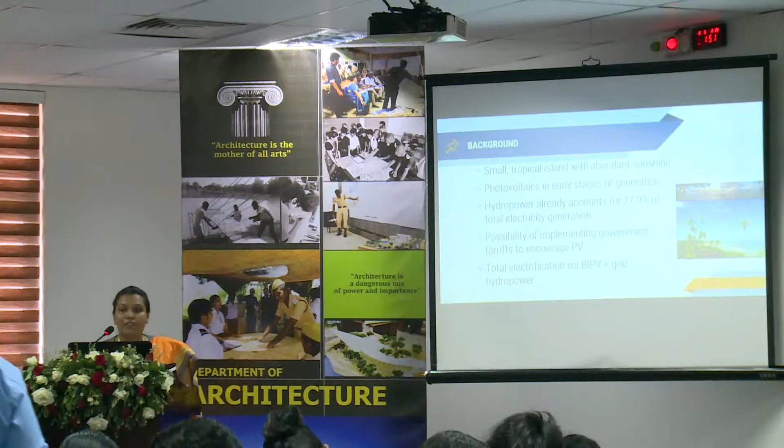So though we receive enough solar radiation, the utilization of photovoltaic panels is still in its early stages of generation. And hydropower already accounts for 27.9% of the total electricity generation.

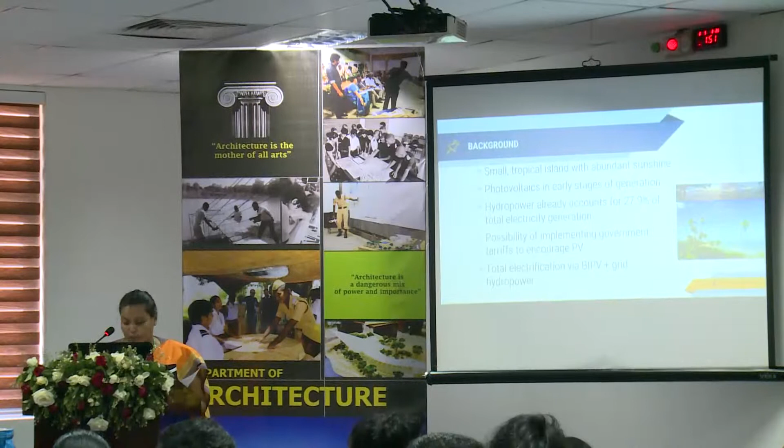So there's possibility of implementing government tariffs to encourage photovoltaics. Further actions are also being taken to encourage photovoltaics in Sri Lanka, as it has potential.

So why we selected Sri Lanka for this study is: Sri Lanka's total energy requirement for a year is around 11,125 kilotons oil equivalent, as per the statistics we got in 2015, right?

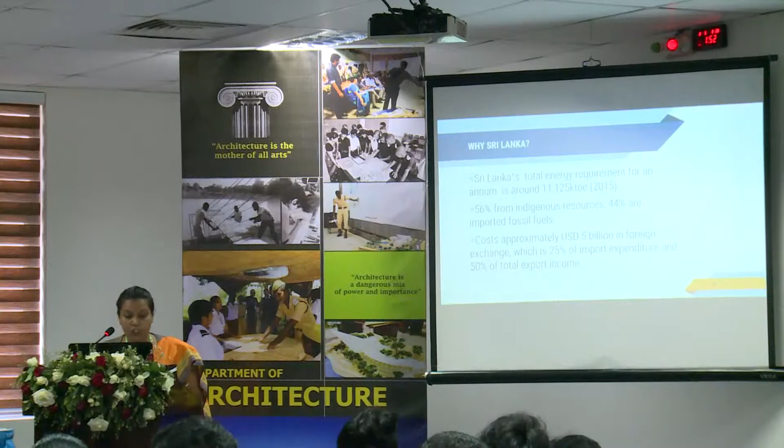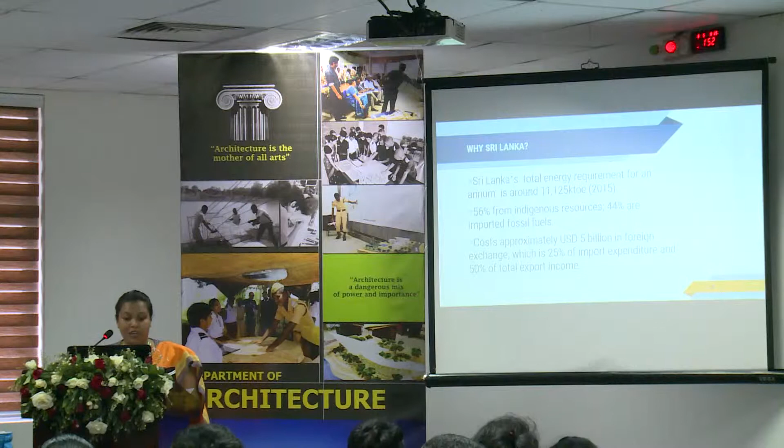So out of the total energy requirement, 56% is from indigenous resources, and the rest 44% is imported as fossil fuels. For this importation, we cost $5 billion per year, and that cost is 25% of import expenditure and 50% of total export income.

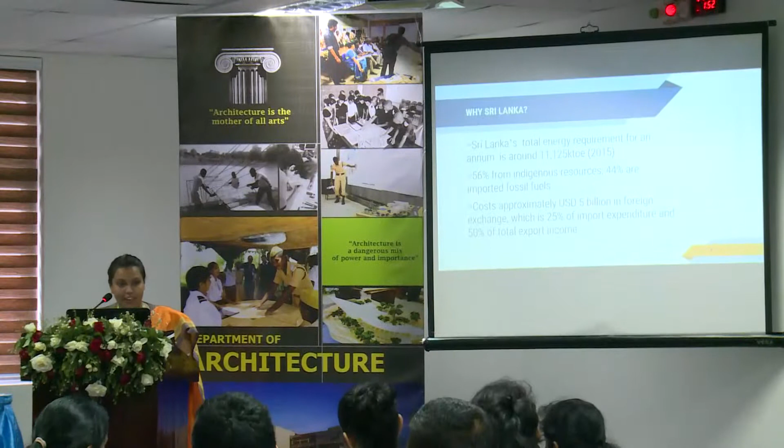So can you imagine, or can you understand the criticality of this situation, what we waste for importation of energy, right? Okay.

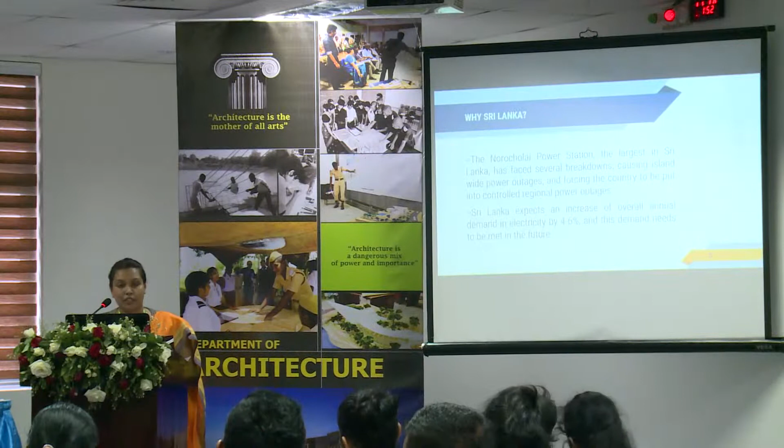This situation is because we have a huge large-scale power station in Norochcholai, but we know that it faces several breakdowns from its beginning. So at the moment it's not practical to use this Norochcholai power station to meet national demand.

So there's a requirement to put regional power outages all around the country to fulfill this energy demand. Sri Lanka expects an increase of overall annual electricity demand by 4 to 6% in the future.

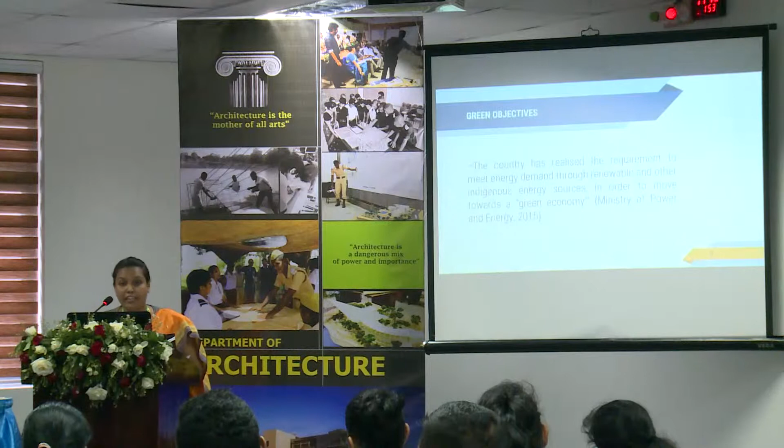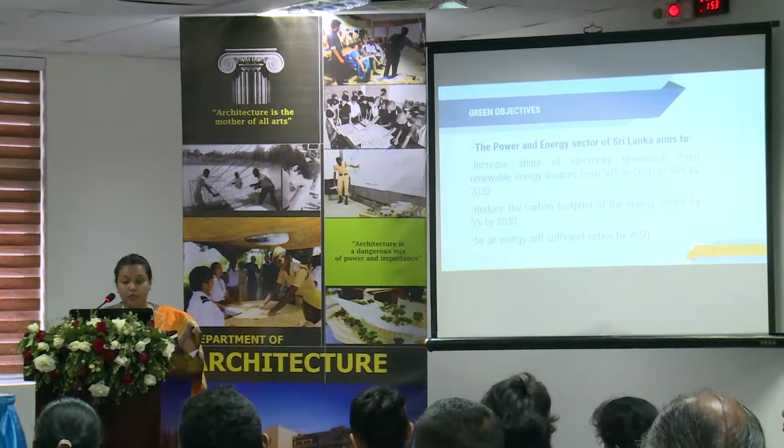So government has identified this potential increase in energy demand in the future, and as a solution, they have identified the need to go for green energy solutions.

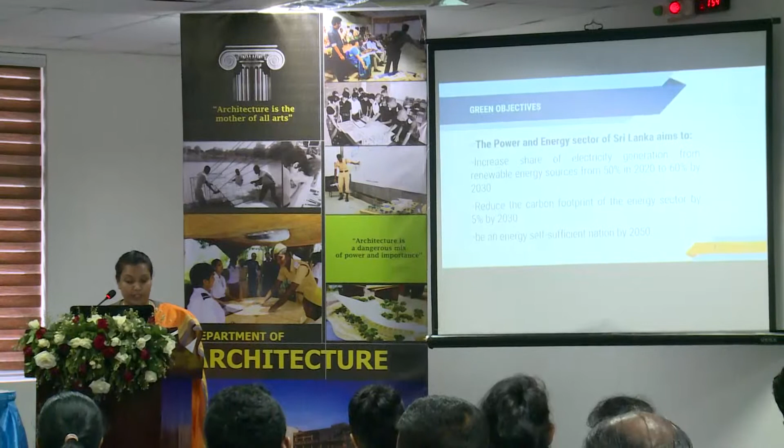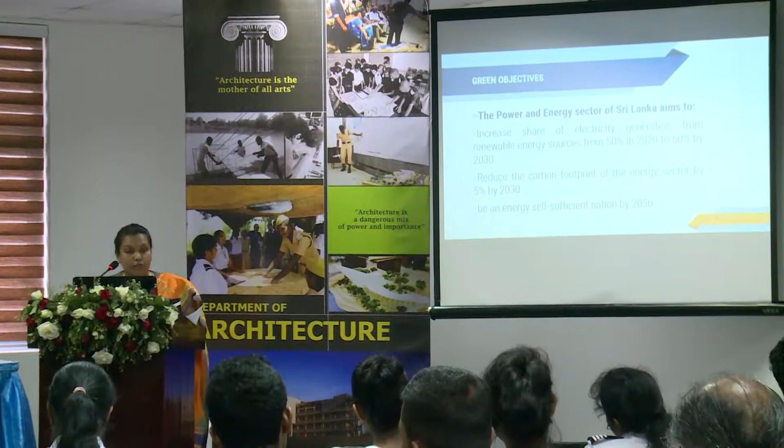Increase share of electricity generation from renewable energy sources from 50% in 2020 to 60% by 2030. This is what the government is predicting to have in the future, and they predict to reduce the carbon footprint of the energy sector by 5% by 2030, and ultimately be a self-sufficient nation with energy by 2050.

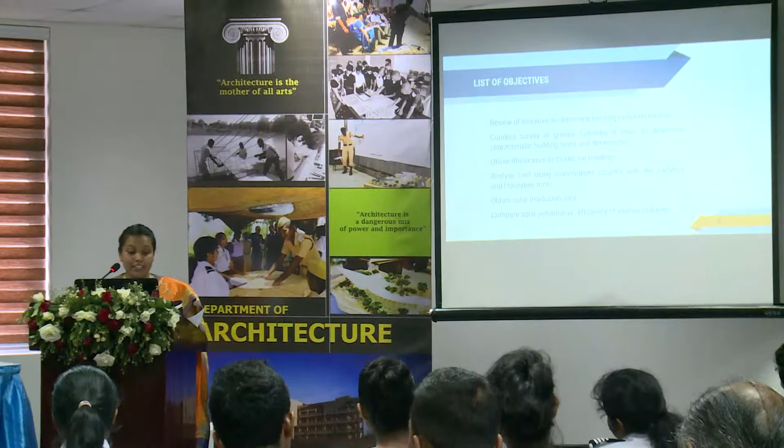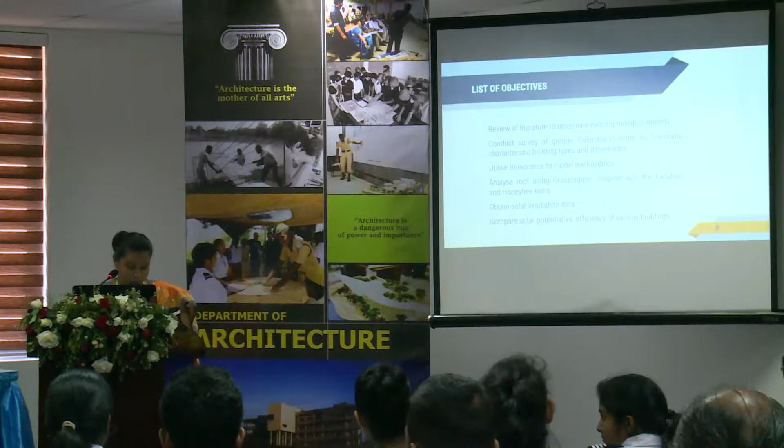So to achieve this target, they have listed out objectives, and now we are moving into our research objectives. So in order to conduct this research...

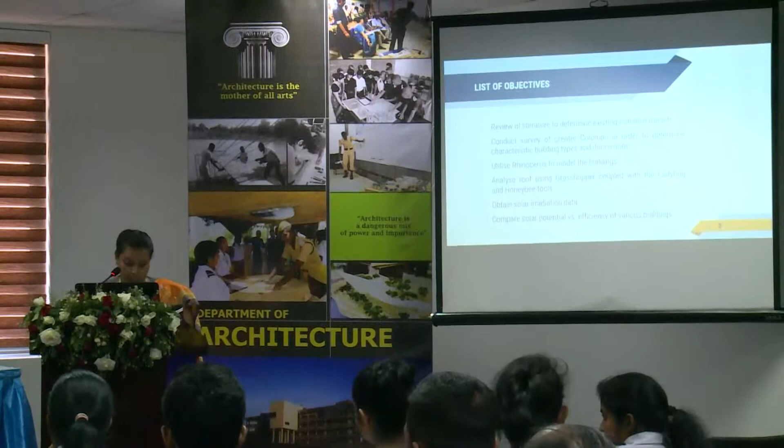In order to determine the existing radiation models, then as the second step, we surveyed several neighborhoods in greater Colombo. This was conducted in order to identify characteristic building forms and their dimensions.

Then Rhinoceros tool, which is a simulation software, was used to model the basic domestic buildings, coupled with the Grasshopper plugin and Ladybug, and there's a tool called Honeybee. So we use that as well in order to analyze the roofs in terms of incident solar radiation.

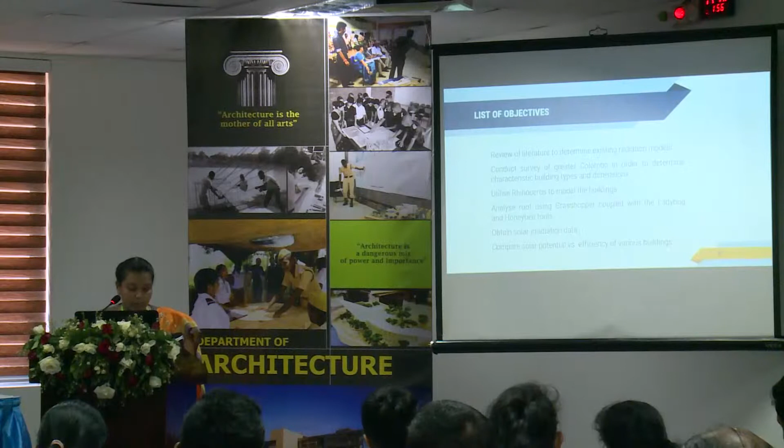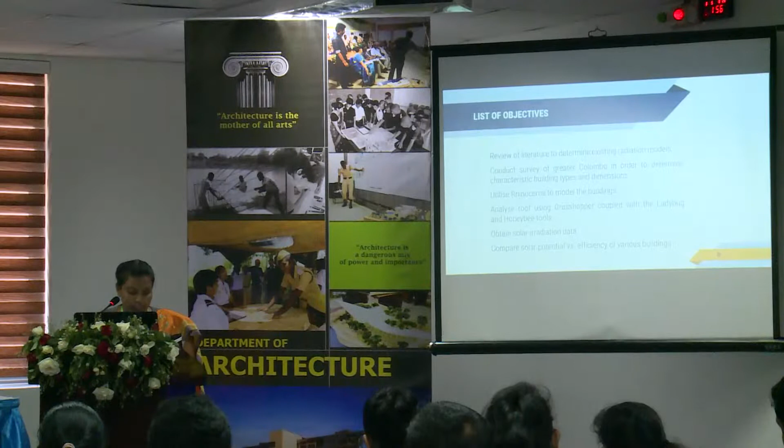Then the surface area to volume ratio of the building was calculated as a measure of thermal efficiency of the building. That's how we calculated the thermal efficiency of the building. Then, moving into the methodology.

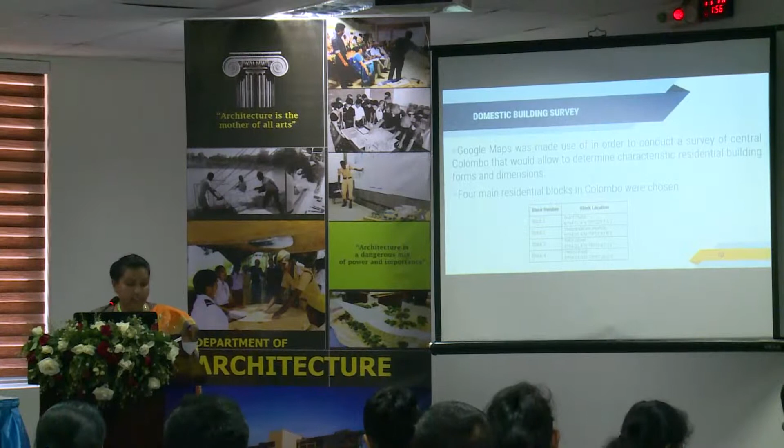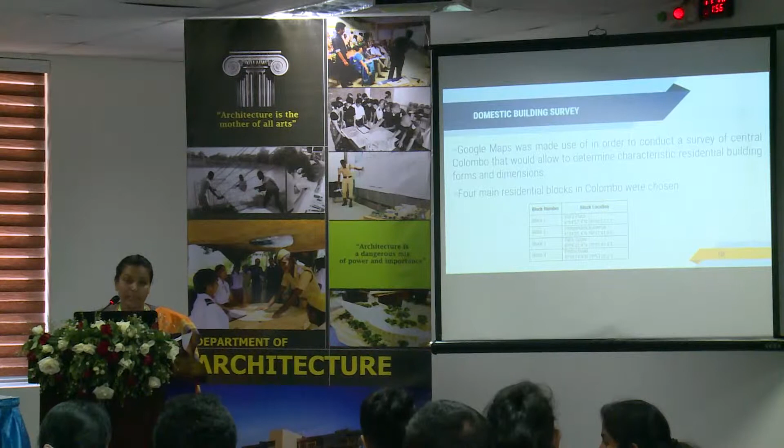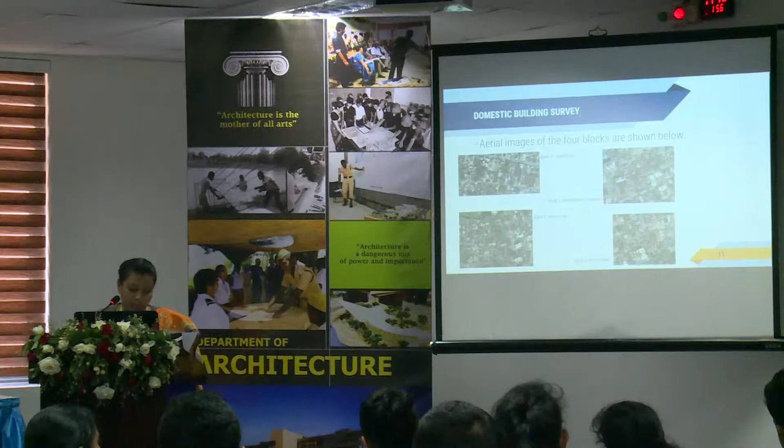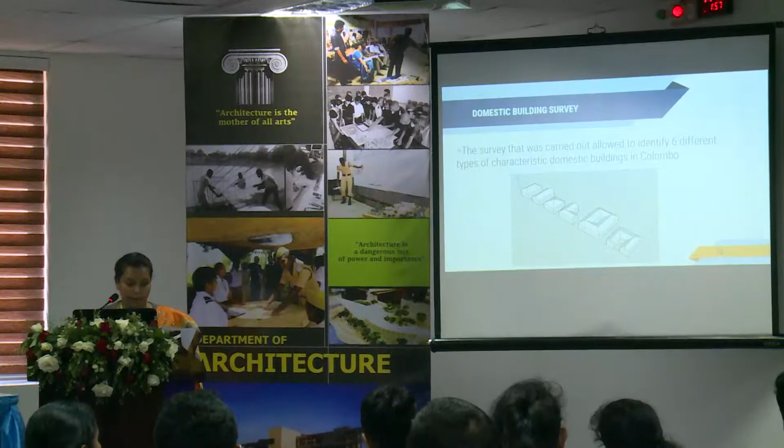Out of these 4 neighborhoods, 6 characteristic buildings were identified. These are the 6 characteristics which we identified as the samples. Their dimensions were obtained as shown in this table.

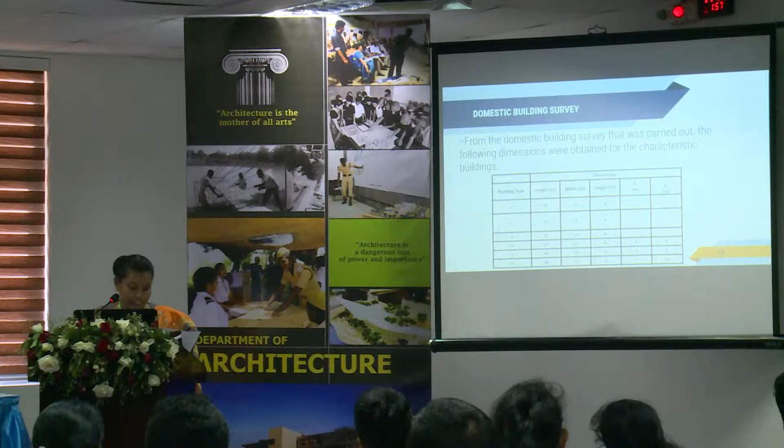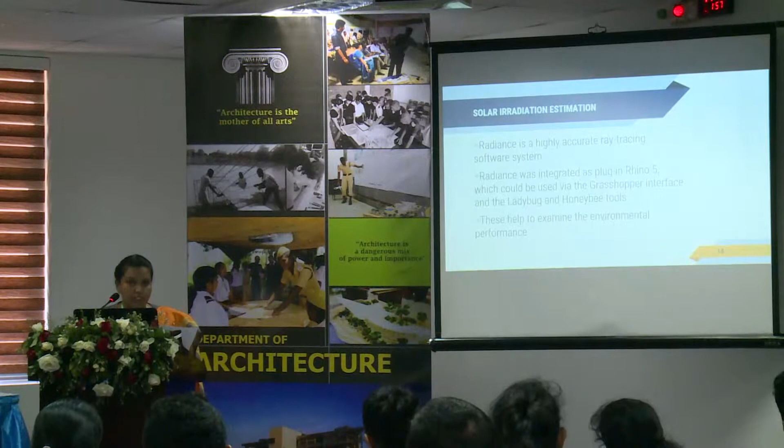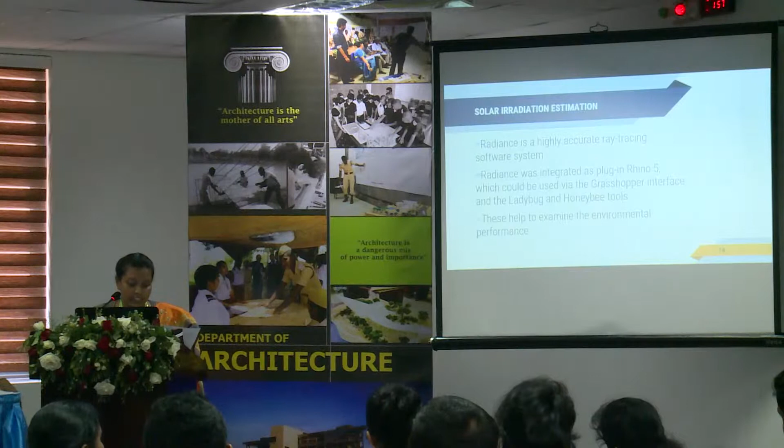Then for solar irradiation, simulation was done for these 6 types, using the simulation engine called Radiance, which was integrated in Rhinoceros 5 via the Grasshopper plugin and the Ladybug and Honeybee tools.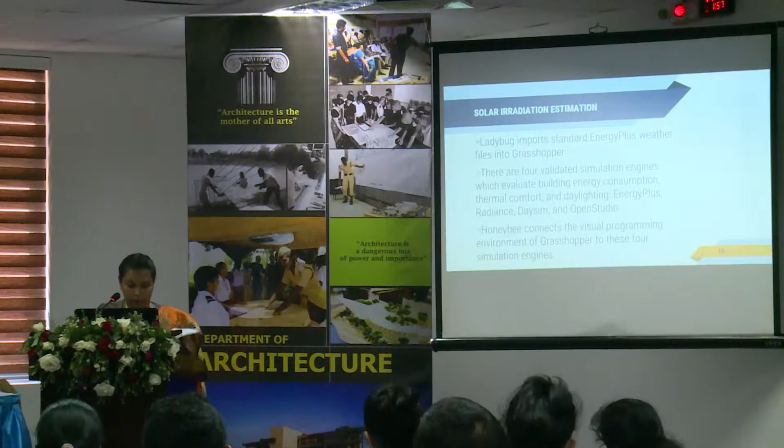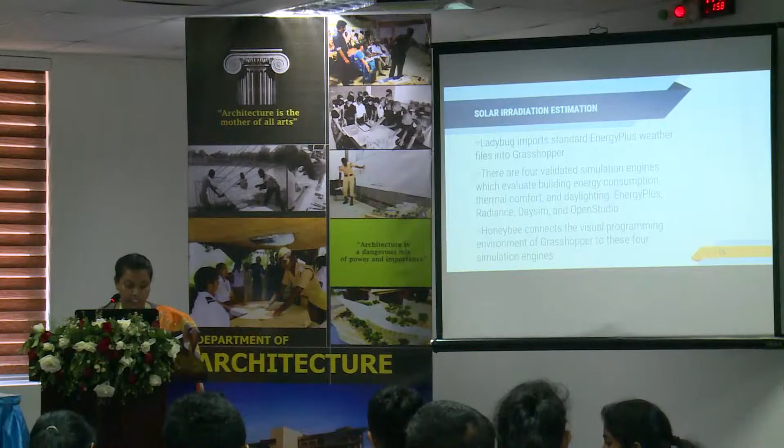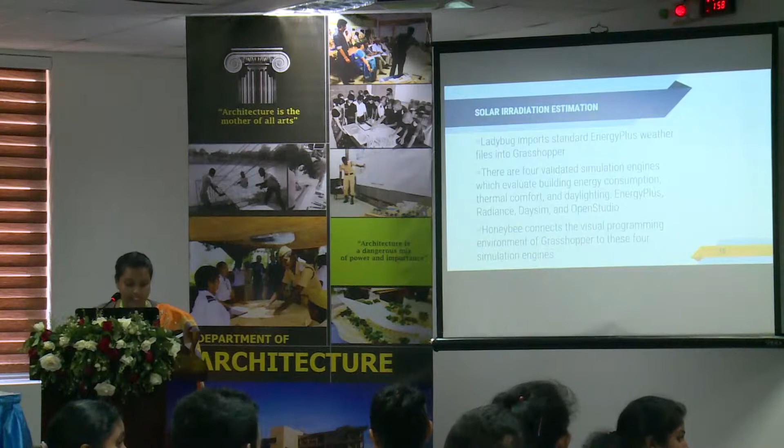The Ladybug tool imports the weather data into the program. That's the task of the Ladybug tool. Honeybee connects the user interface of Grasshopper to 4 simulation engines which help evaluate environmental performance. These are EnergyPlus, Radiance, Daysim and OpenStudio, which evaluate building energy consumption, thermal comfort and daylighting.

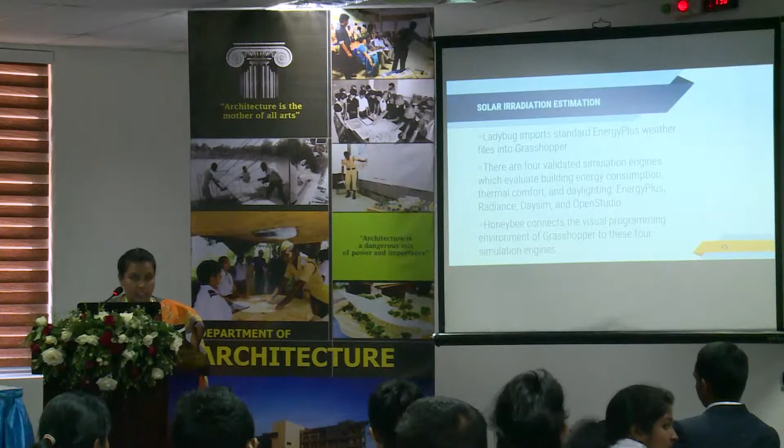These are the things we evaluated using the above mentioned simulation tools and plugins.

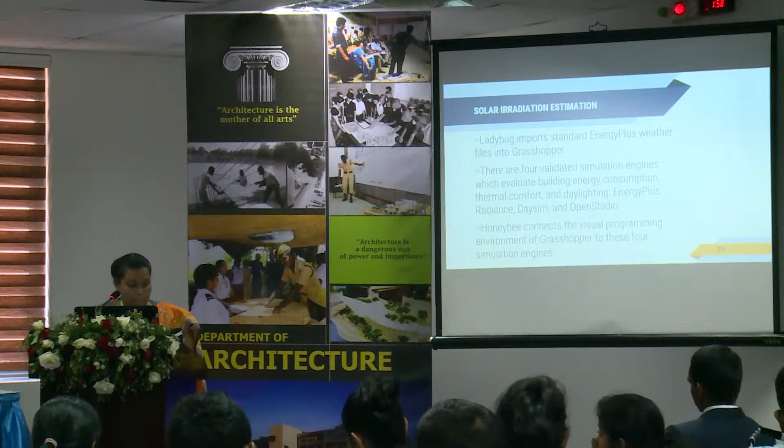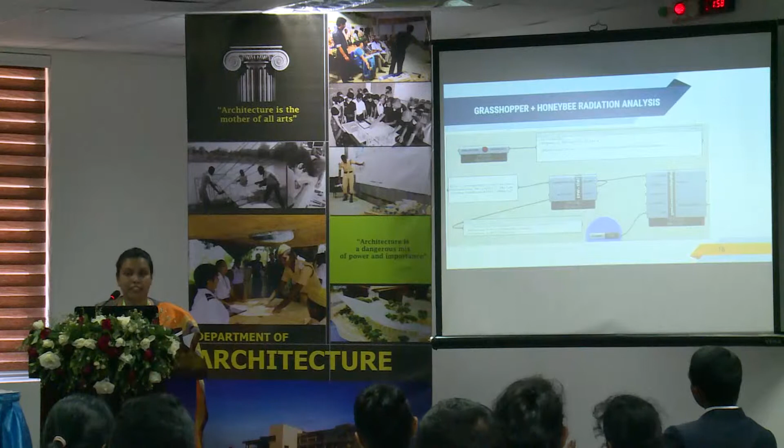This is the process which we adopted. This is how the Grasshopper and Honeybee radiation analysis appears in the simulation tool interface.

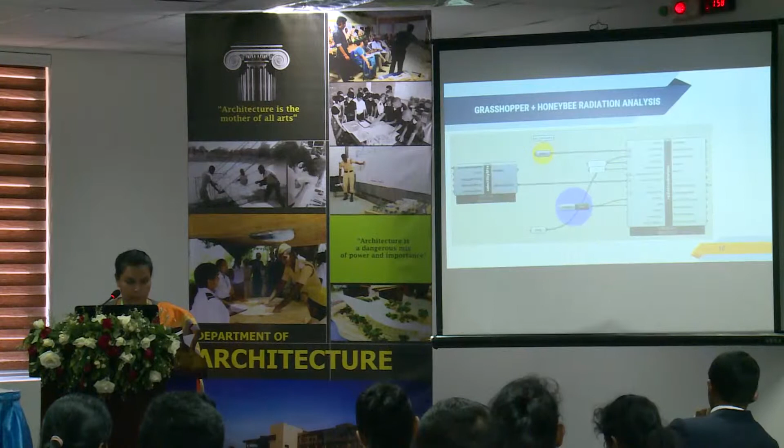These slides show how the network is used on Grasshopper for the radiation analysis.

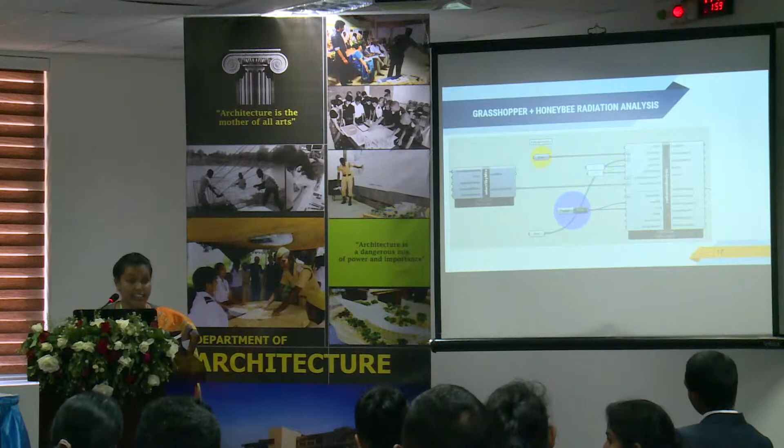Coming into the results, what we found from this research - these are the results, which we can visualize with colors. The simulation was run for all 6 types of buildings, and the results obtained are shown for all 6 types.

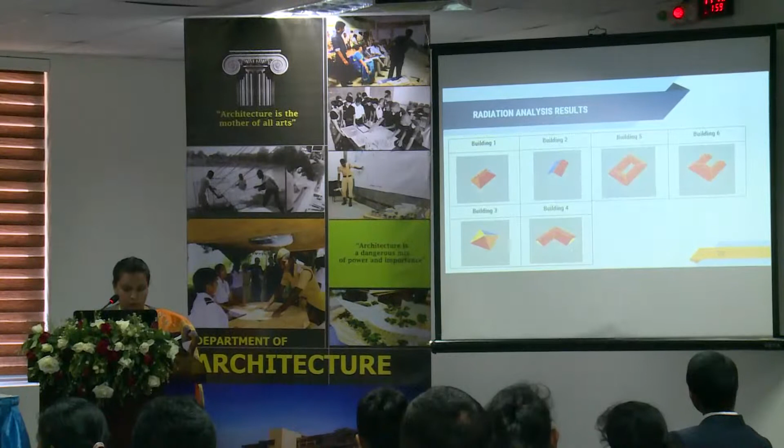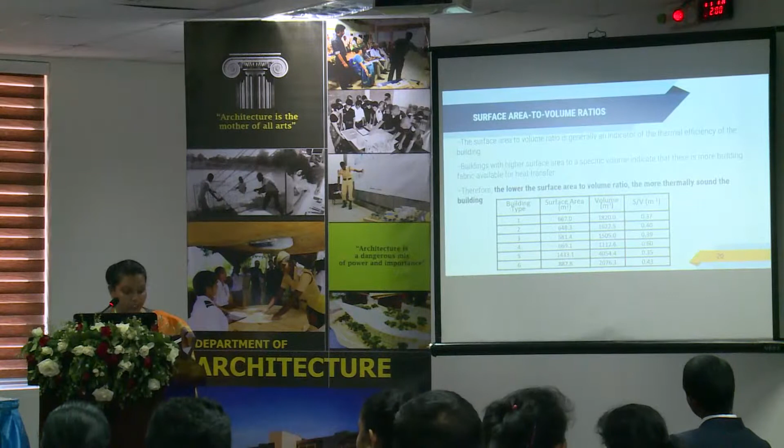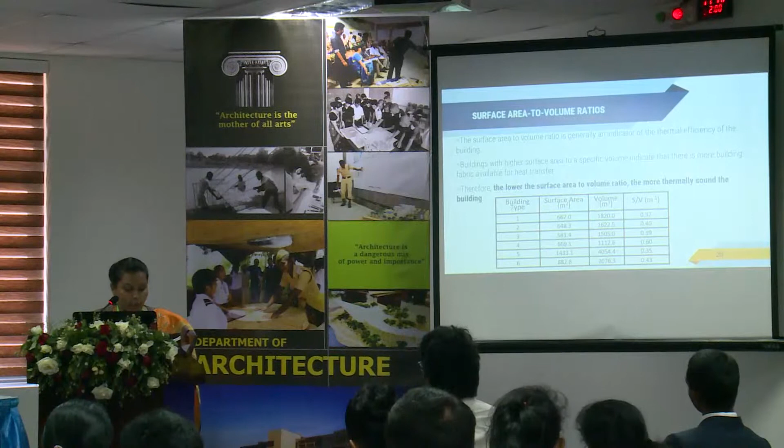The surface area to volume ratio was calculated for the 6 houses. This ratio was used as an indicator of thermal efficiency of the building, as a very simple method. A building with higher surface area to specific volume would have more fabric area available for heat transfer, therefore making it less thermally sound.

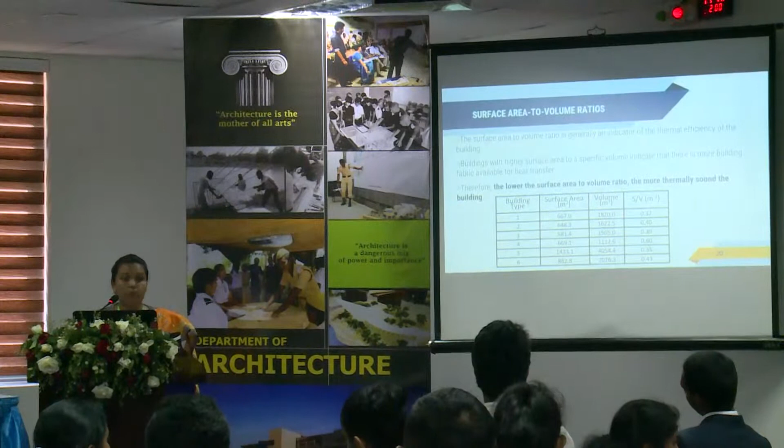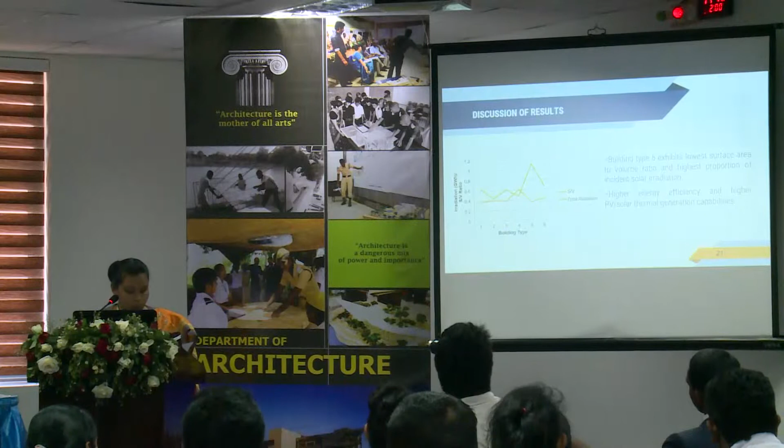The buildings which have a lower surface to volume ratio were more successful according to the results. So according to that analysis, building type 5 was the most successful building typology out of the 6, being the best in terms of thermal efficiency as it had a lower surface area to volume ratio.

Also, it exhibited higher amounts of incident solar irradiation, which means it is more favorable for photovoltaics or installation of solar thermal roof plants.

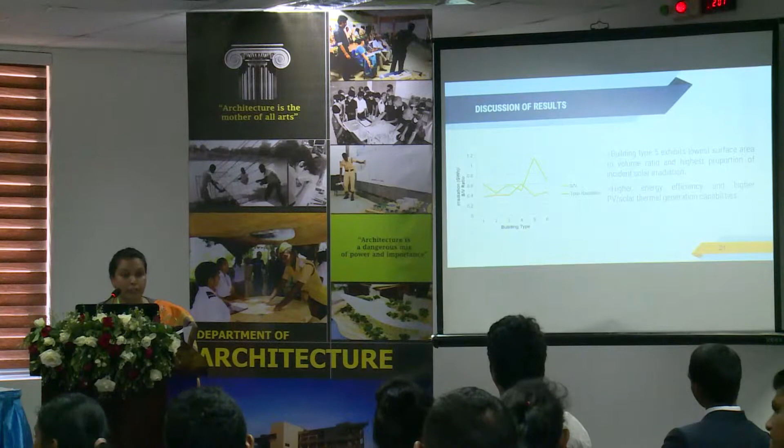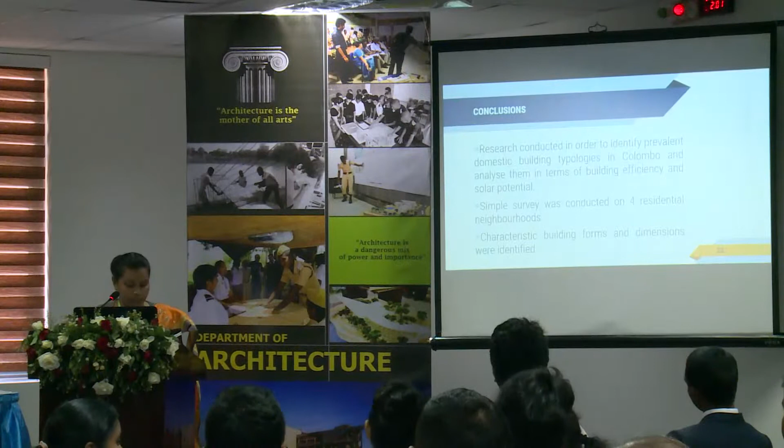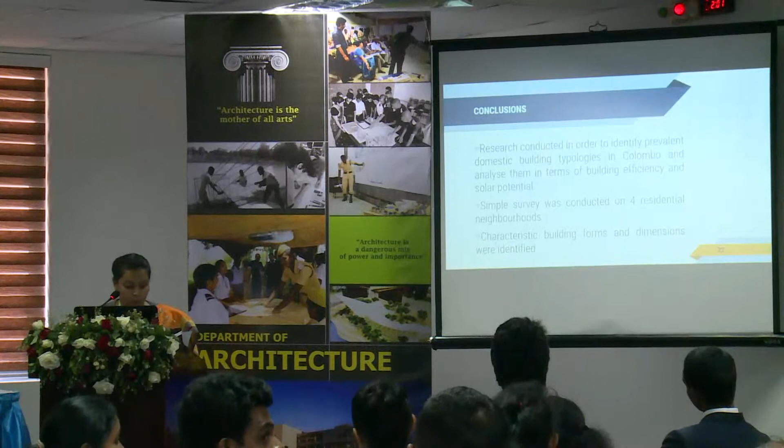This is the conclusion we came to at the end of the research, conducted as a summary. This research was conducted in order to identify prevalent domestic building typologies in Colombo and analyze them in terms of building efficiency and solar potential.

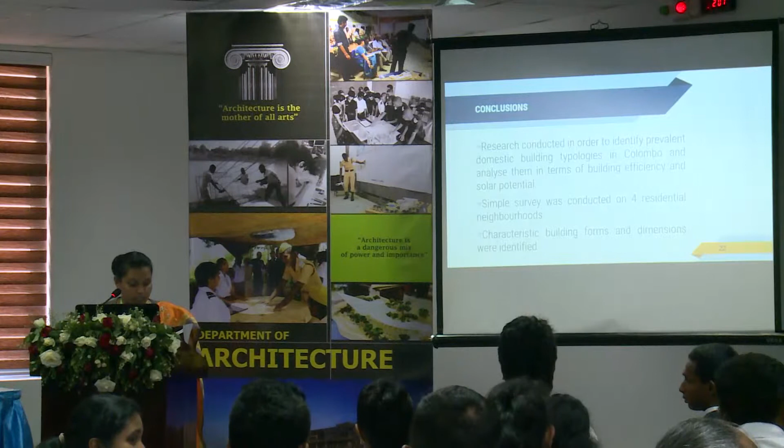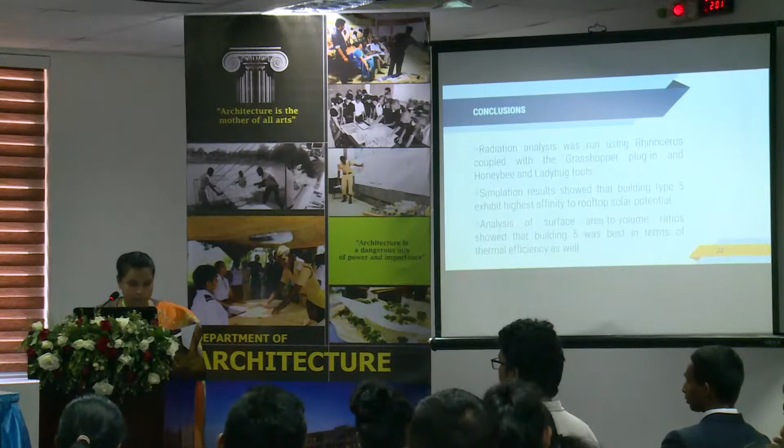We did a survey to find 4 neighborhoods in Colombo, and then found 6 characteristic buildings out of those neighborhoods. A radiation analysis was conducted using Grasshopper, coupled with Ladybug and Honeybee tools, and an analysis on surface area to volume ratio revealed that building typology 5 is the best in terms of available rooftop solar potential and thermal efficiency.

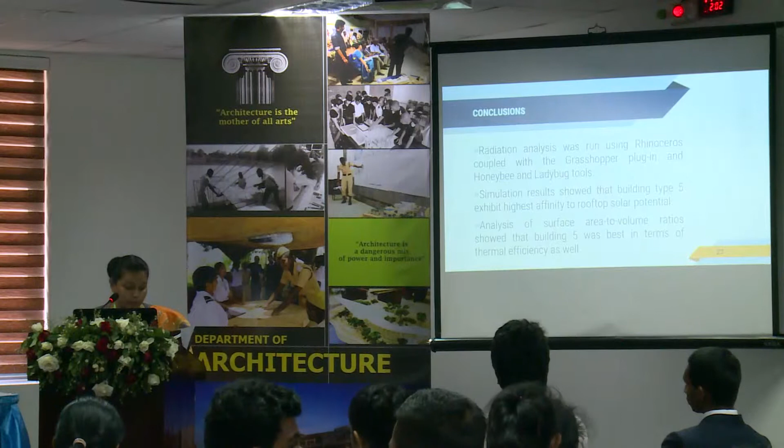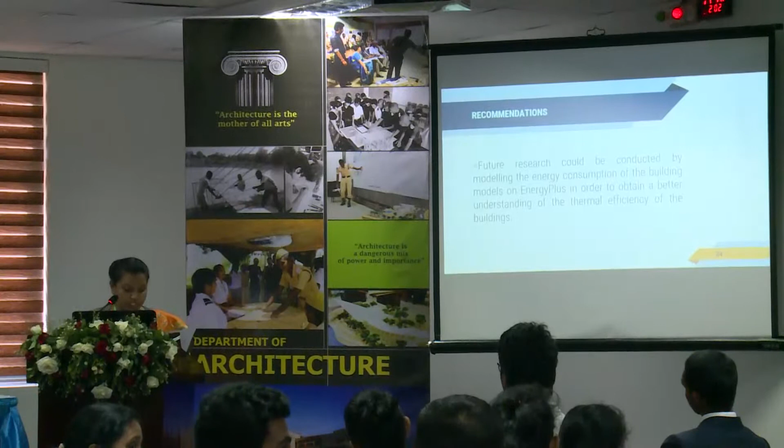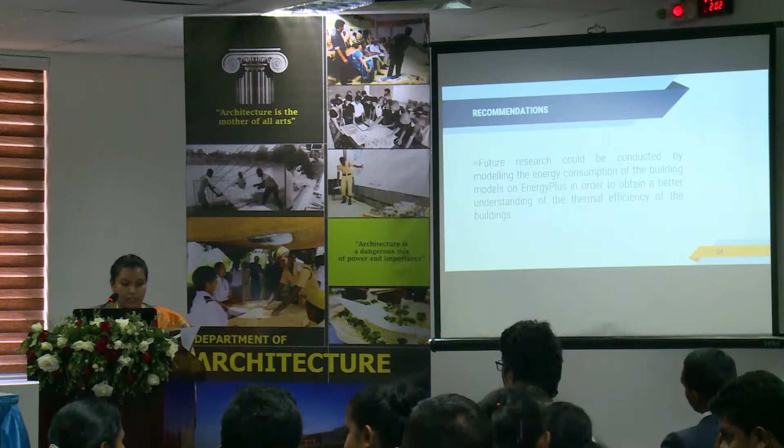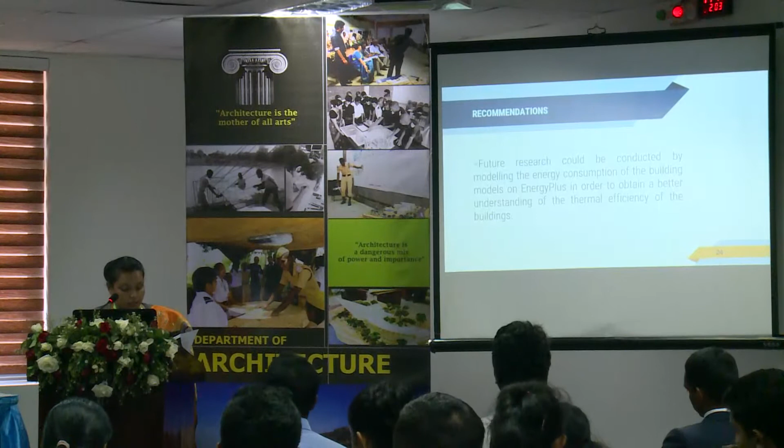As recommendations for future research, we recommend using EnergyPlus in order to run comprehensive energy consumption analysis on the building, to obtain a deeper understanding and quantitative results regarding the thermal efficiency of the building. If someone is extending this research further, our recommendation is to use the EnergyPlus tool in a more efficient way, which will lead to better identification at the end.